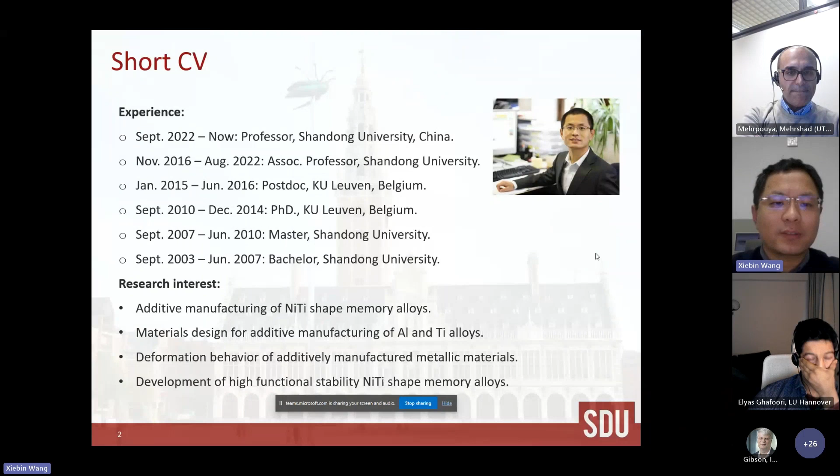Today, I would like to share our results on laser powder bed fusion, or LPBF, of nickel titanium binary alloys, and LPBF in situ alloying of nickel titanium niobium ternary alloys.

Firstly, I would like to introduce briefly what a shape memory alloy is. As compared with conventional alloys, shape memory alloys show the unique shape memory effect and super elasticity. For the shape memory effect, it means if you deform this material and then heat it up, increasing the temperature, the deformed part will recover back to its original shape.

If you look at the stress-strain curve, during loading, the material is deformed. After unloading, there is no recovery, so the sample remains in the deformed state. But if you increase the temperature, following the red curve, it will recover to its original shape. This is called the shape memory effect. And it also shows super elasticity.

If you look at the video, this kind of alloy shows very good elasticity. Looking at the curve, if you deform it, it shows a plateau. This is caused by stress-induced martensitic transformation, and during unloading, the martensite transforms back to the austenite phase. In the meantime, the shape of the material also recovers back to its original shape. This is called superelasticity, mainly caused by the transformation between austenite phase and martensite phase.

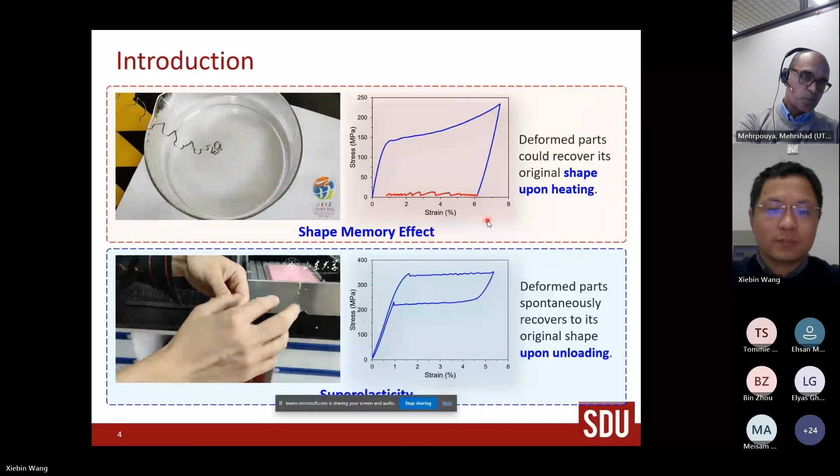Due to these unique properties, shape memory alloys have been widely used in many fields, for example, medical parts like stents and staples. But for nickel titanium alloys, they can only be used in a temperature range of about -20 degrees to 80 degrees, because the transformation temperature falls in this range.

Of course, there are other systems for shape memory alloys, like iron-based and copper-based alloys. But for iron-based alloys, the shape memory effect and superelasticity are not that high. And for copper-based alloys, normally you need single crystals. So this transformation temperature limits the use of nickel titanium alloys.

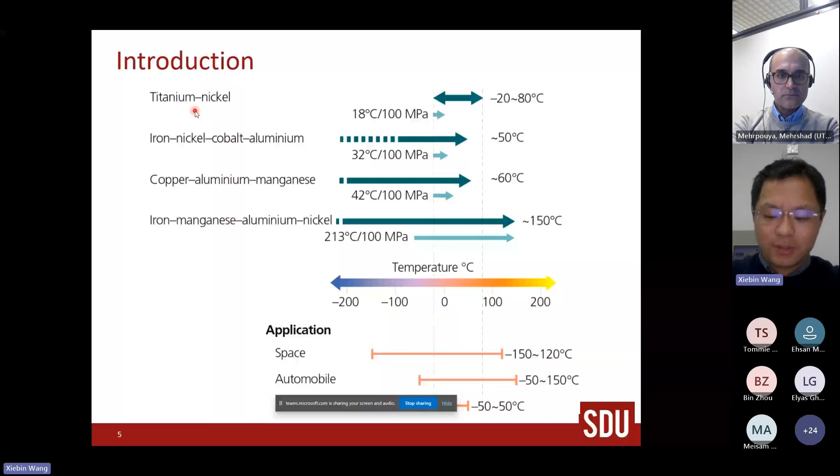In order to improve and tailor the transformation behavior and widen the application of binary nickel titanium alloys, people add ternary elements to modify the transformation behavior. For example, adding iron to nickel titanium lowers the transformation temperature, adding niobium widens the transformation hysteresis, adding copper narrows the transformation hysteresis, and adding hafnium increases the transformation temperature. This is called high temperature shape memory alloys.

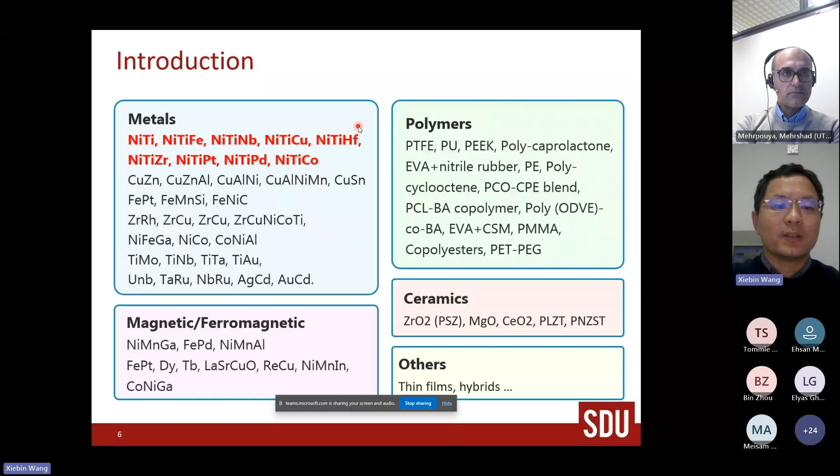But for this kind of alloys, there are several challenges to making them. I did a little summary: there are mainly two challenges. The first is that they're difficult to process. For example, if you want to make nickel titanium niobium ternary alloys, there is a very large difference in melting point between titanium, nickel, and niobium. So during casting, it's not easy to get a homogeneous melt, and the microstructure becomes inhomogeneous.

This gives a lot of problems for utilizing this kind of material. It's also easy to oxidize and forms a lot of intermetallics. Even after you cast this kind of alloy, when you want to make devices, you'll meet a lot of problems, mainly due to difficulty machining and welding these materials. Especially during welding, there are a lot of cracks and defects, which is very harmful for the mechanical properties.

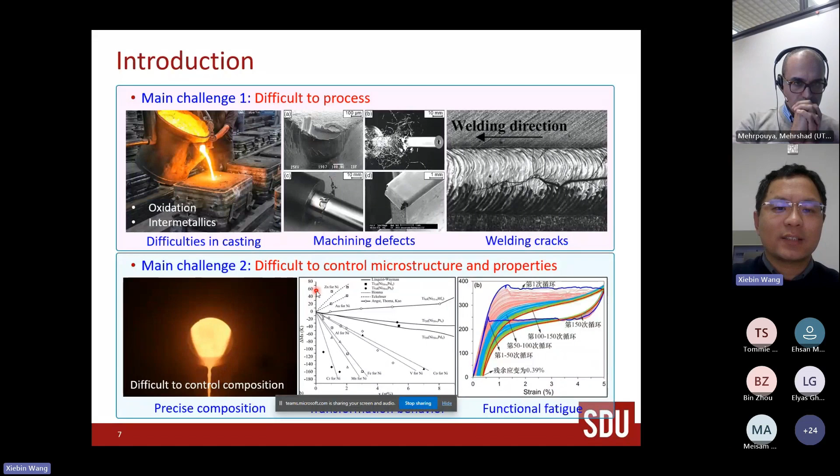So in order to address these challenges, we want to use laser powder bed fusion, or additive manufacturing, to solve all these problems. What we want to do is use laser powder bed fusion as a manufacturing method to make geometrically complex nickel titanium ternary or even quaternary structures.

We want to use laser powder bed fusion as a metallurgical method to do in situ alloying to make nickel titanium ternary alloys, using, for example, nickel titanium powders and niobium powders to make nickel titanium niobium ternary alloys. We also want to use laser powder bed fusion to tailor its microstructure and transformation behavior, and of course the functional properties.

Because the transformation behavior of nickel titanium alloys is very sensitive to its microstructure, if you change the LPBF process, you will more or less modify the microstructure, and based on this relation we could tailor or at least change the transformation behavior of these alloys. I will show the examples later. If we achieve all this, we may have approaches to make complex nickel titanium based alloys or structures with tailorable properties.

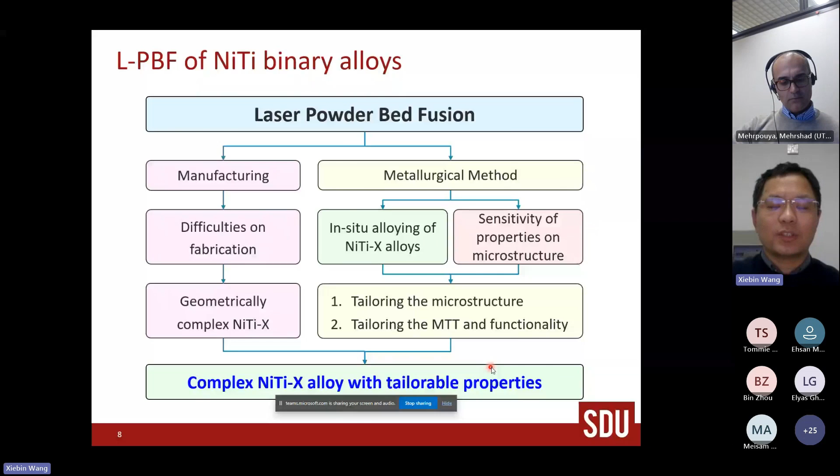In order to achieve this, we first analyze the interaction between laser and nickel titanium powders, and we found that a lot of phenomena occur during this process. For example, nickel evaporation, because nickel has a lower melting point than titanium, so at high temperatures nickel is more easy to evaporate as compared with titanium.

After the additive manufacturing process, the parts will have a lower nickel content than the powders. There will also be oxidation of titanium elements and precipitation of nickel-4-titanium-3 particles or titanium-2-nickel particles and other particles. Additive manufactured parts also show strong texture, high density of dislocations, and high residual stresses, along with coarse grains and microstructure inhomogeneity.

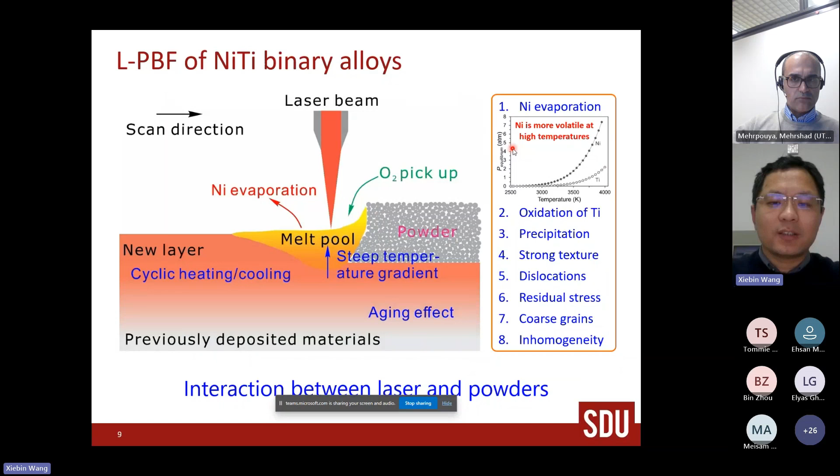Of all these factors, we found that the first one, nickel evaporation, is the most important factor influencing the transformation behavior and functional properties of nickel titanium alloys. We then printed these samples and did process optimization.

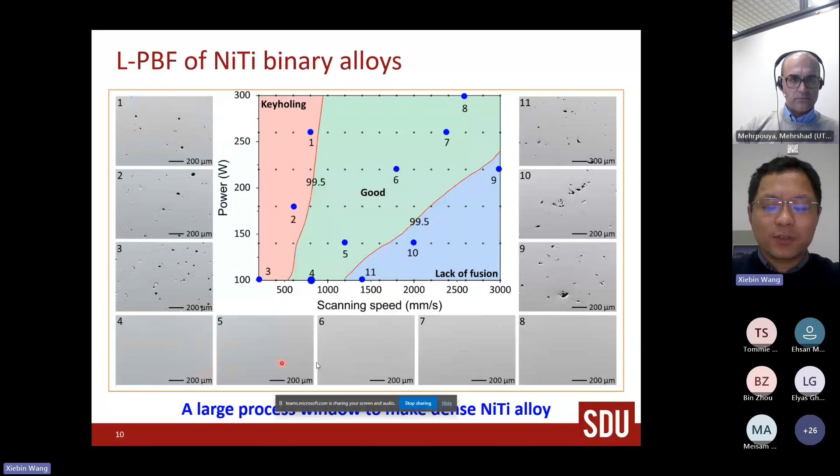It's very similar to other alloys: with high energy input you get a lot of keyhole pores, and with low energy input you get a lot of lack-of-fusion defects. But there's a large process window to get dense and almost defect-free samples.

Then we checked the phase transformation behavior. It's quite interesting that if you look at the transformation peaks, they shift gradually to the lower temperature side if you increase the scanning speed, keeping the laser power, hatch spacing, and layer thickness constant and only changing the scanning speed. So the transformation temperature decreases with the increase of scanning speed.

It also decreases with the increase of the hatch spacing, meaning that if you decrease the energy input, the transformation temperature decreases. The mechanism underneath this phenomenon is quite clear: if you lower the energy input, you lower the nickel loss by evaporation, so lower nickel evaporation leads to a higher nickel content in the matrix, and then a lower martensite transformation temperature.

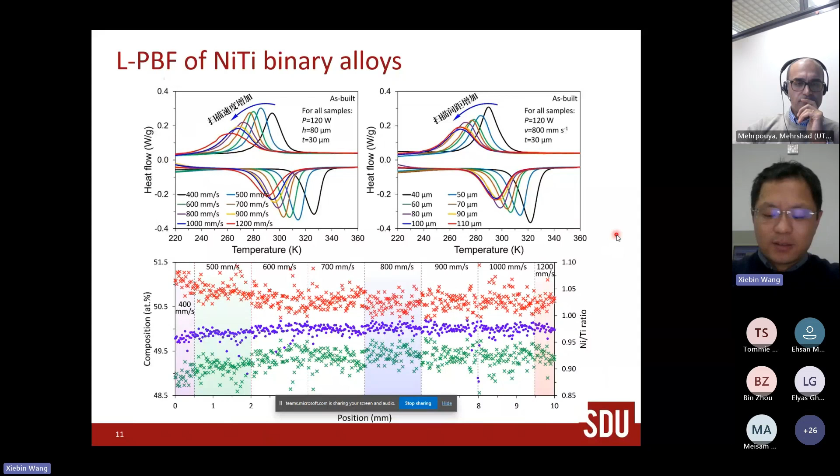So the very important aspect of these results is that if you want to tailor the transformation temperature, you normally have to control the nickel content very precisely, down to something like 0.01%. But with LPBF, you can just change the scanning speed - it's very easy to modify and then to tailor the transformation temperatures. If you want to tailor transformation temperature, you have to modify the process parameters.

But if we learn from the LPBF of other alloys, normally you need optimized process parameters to get a fully dense material. Here we changed the scanning speed from 400 millimeters per second to 1200 millimeters per second, which of course causes a lot of defects in the material with high energy input, like the 400 millimeter per second sample.

But interestingly, if we change this scanning speed from 400 to 1000 millimeters per second, the ductility or total elongation of these samples is almost the same, all higher than 12%. It means that even with such large keyhole pores, it doesn't undermine the ductility of this material, which is quite different from other alloys like aluminum and titanium alloys.

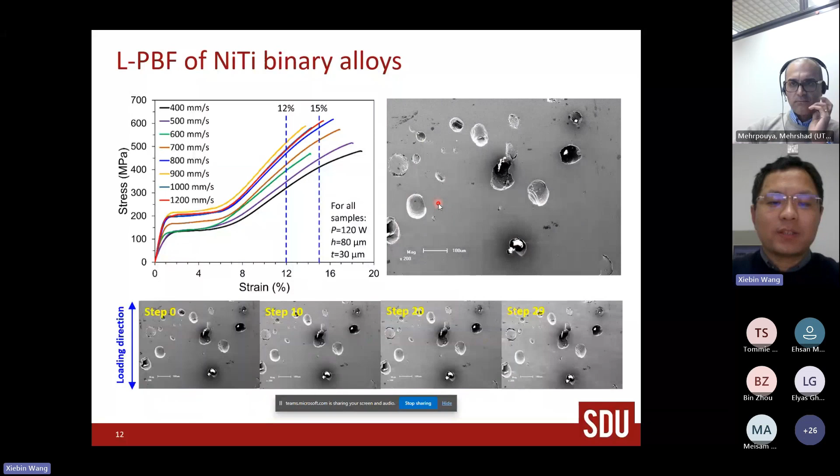But the reason for this phenomenon is very simple. If you look at the stress-strain curve, there's a plateau at a very low stress level, below 200 megapascals, or even at 100 megapascals, and at such a low stress level the sample can deform like 6%. So at this plateau the pores don't break, and that gives you high ductility.

And then we check the functional properties of this binary alloy. It shows very good shape memory effect at free recovery, and of course it also shows good shape memory effect at a constant stress of 100 megapascal.

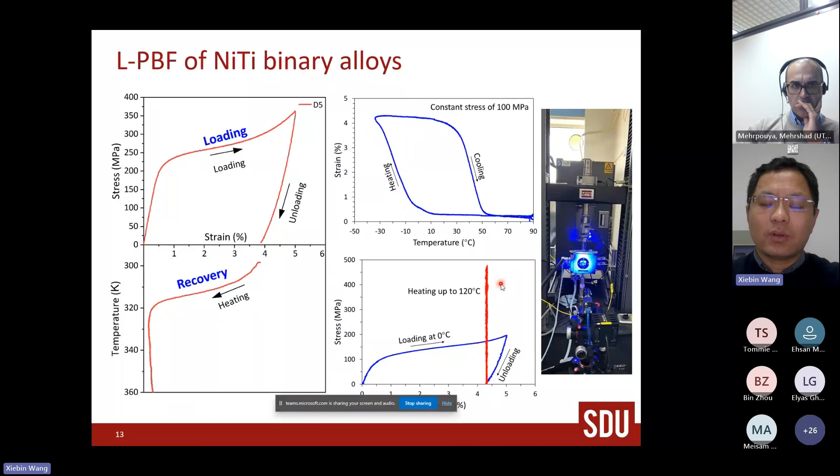We also checked the recovery force of this printed sample. The highest recovery force is higher than 450 megapascal.

We also measured the superelasticity of this printed binary alloy with a pre-strain of 5%. It can survive higher than 150 superelastic cycles, and after 150 cycles, the residual strain is lower than 1%. This means this material shows very good superelasticity, comparable to conventionally made nickel titanium alloys.

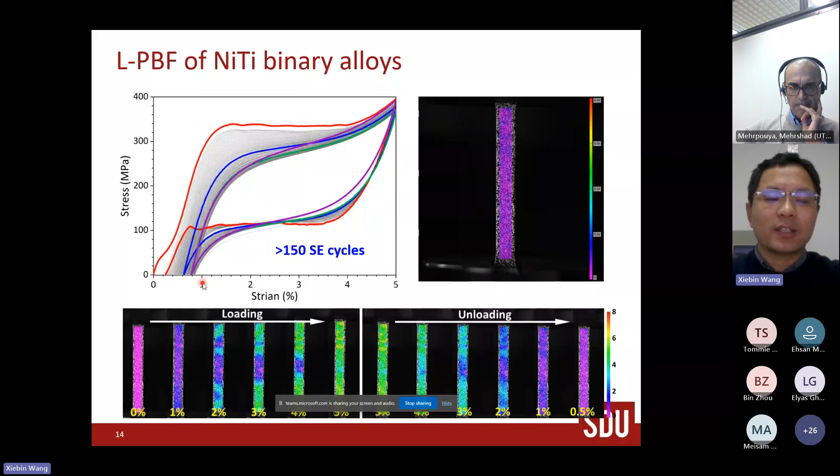The previous study shows that if you change the LPBF process parameters, you change the transformation temperatures of nickel titanium alloys. So we selected two parameters to produce this layer-structured material, with each layer having 200 microns.

Different layers have different transformation temperatures, and at room temperature we get this layer-structured microstructure. The colored parts are austenitic phase, and the black parts are martensite phase, because martensite has very fine features and for EBSD it's not possible to get clear patterns.

At room temperature, we get the austenite and martensite layered microstructure. For these materials, we could widen the transformation interval. For example, in conventional nickel titanium alloys, the temperature range between martensite transformation start and finish temperature is around 20 to 40 degrees.

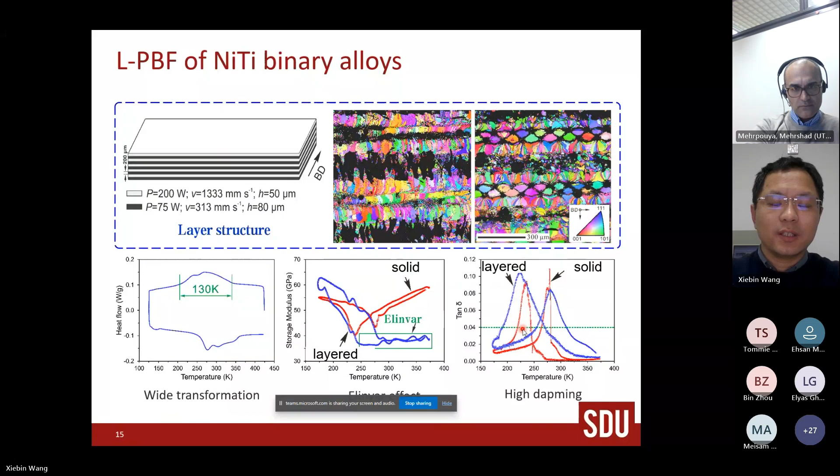Based on our experience making nickel titanium parts by LPBF, we continued this work using LPBF as an in-situ alloying method to make nickel titanium niobium ternary alloys.

Before starting the experiments, we did calculations to see whether adding niobium would cause a lot of solidification cracks. We used Thermo-Calc software, and the results, shown in red, indicate that adding 1% or 3% niobium leads to a lot of solidification cracks. But adding higher niobium content, like 5% or 9%, may give a crack-free sample.

Based on this analysis, we did the experiment. We used pre-alloyed nickel titanium powders with nickel content of 50.6%, and niobium elemental powders with almost the same particle size. After mixing, it looks very homogeneous.

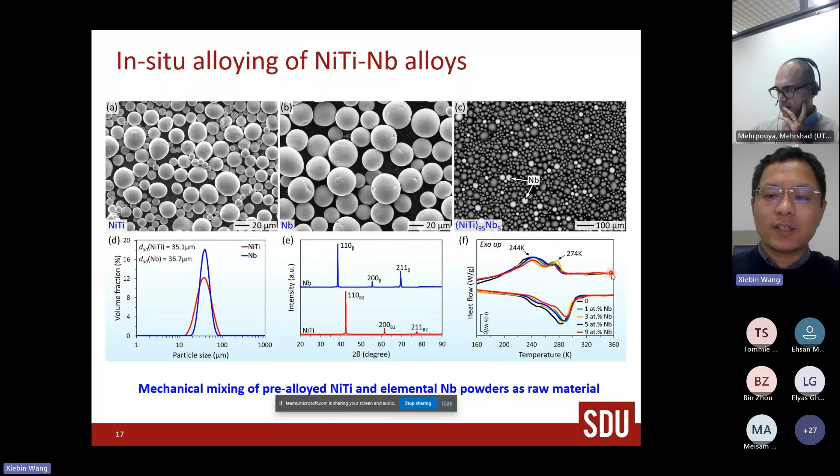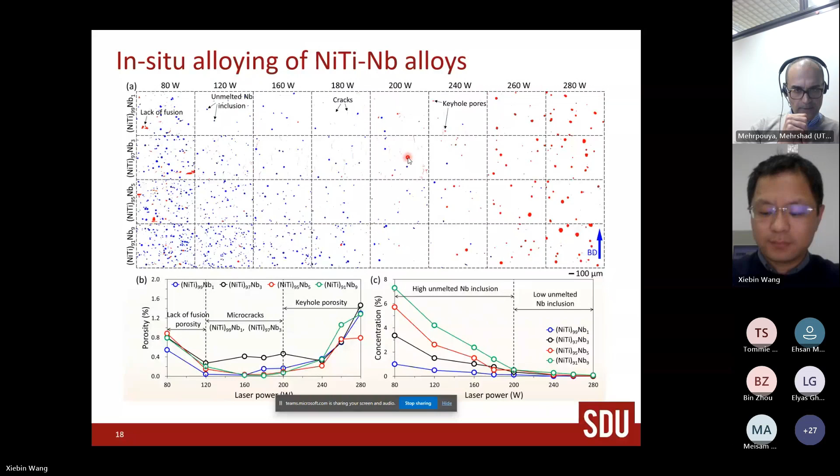We checked the microstructure, and it's a highly inhomogeneous microstructure with unmelted particles. For unmelted niobium particles, there's a strong metallurgical bond with the matrix, because there's a eutectic region between unmelted niobium particles and the nickel-titanium matrix. Also there's a lot of niobium-rich swirls, and in this niobium-rich region there's niobium dendrites and cellular structures.

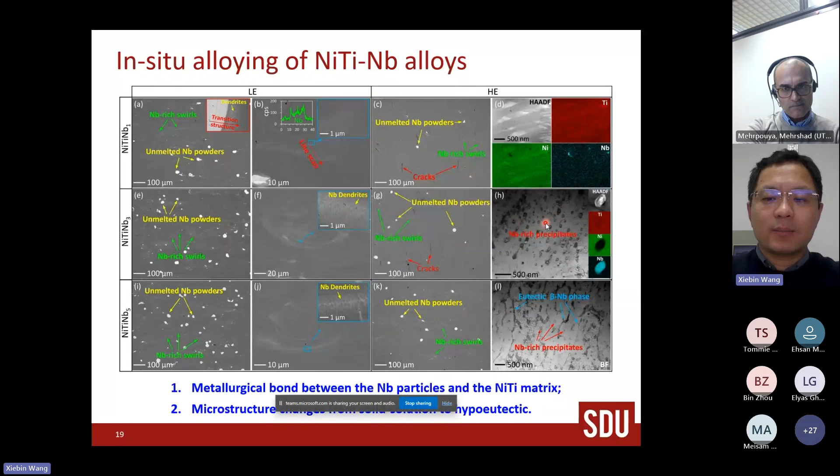If you look at more details with TEM, there's also some niobium-rich precipitates, and we checked the chemical composition — it's not pure niobium, it's niobium with some titanium. It's a beta niobium particle.

Then we checked the transformation temperature of these alloys. This result is actually very interesting. We know that for binary alloys, if you increase the energy input, you increase the transformation temperature. For example, if you increase the laser power, the transformation temperature will increase from the black curve to the blue curve.

If you add only 1% niobium, it shows a similar trend as binary alloys. But if you add 3% niobium, except for the sample printed with very low energy density, the rest of the samples — the blue curve and the red curve — show very similar transformation temperatures. So it means the transformation behavior is not that sensitive to the laser power change.

If you increase the niobium addition to 5%, the transformation temperature actually increases with a decrease of the laser power, or increase with a decrease of the energy input. It's totally opposite to what's observed in nickel-titanium or 1% niobium alloys.

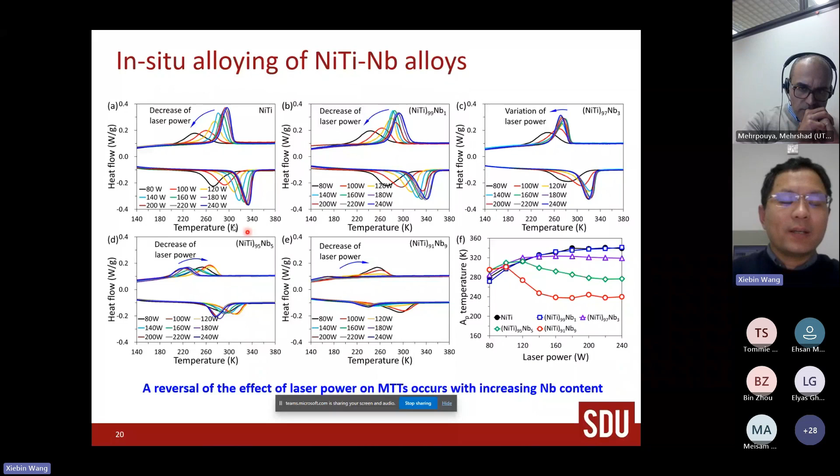Actually, this story is quite simple. It's a competition between the factor that increases the temperature and the factor that suppresses martensite transformation. The factor that increases the transformation temperature with increase of energy density is mainly nickel evaporation — more nickel evaporation, higher martensite transformation temperature.

But there are also factors that suppress martensite transformation. For example, dissolved niobium atoms in the matrix cause severe lattice distortion, and this lattice distortion suppresses martensite transformation. This effect increases with the increase of niobium addition. So with lower niobium addition, the factor that increases transformation temperature is key, and with higher niobium addition, the factor that suppresses martensite transformation is key. So the transformation temperature changes a lot with increasing niobium addition.

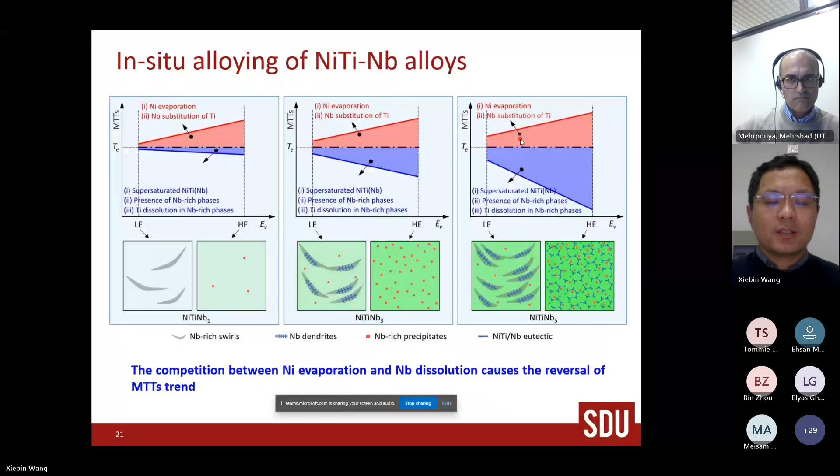For nickel-titanium-niobium ternary alloys, the most important property is the transformation hysteresis — the difference between the cooling peak and the heating peak. For the printed alloys, as well as conventional alloys, we check the hysteresis by first doing a pre-deformation and then heating it up to check the transformation temperature. For example, look at the first figure.

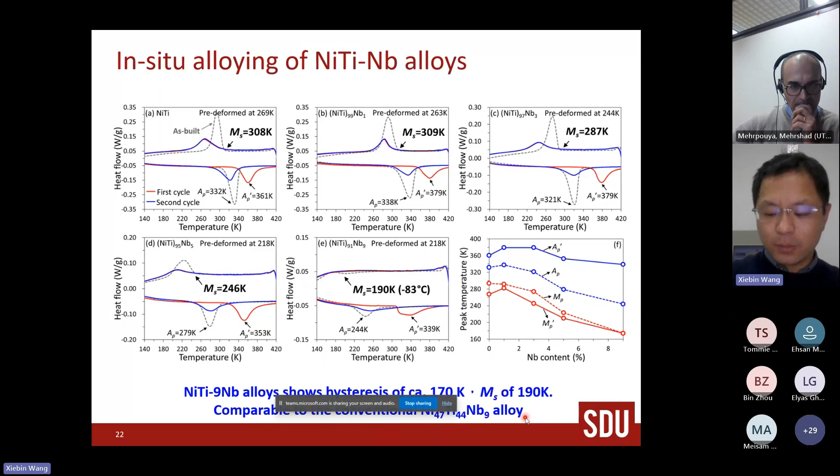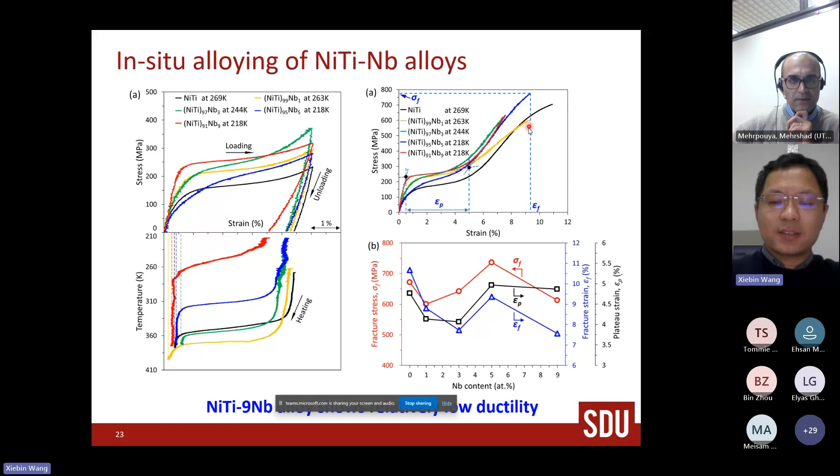Okay, I will quickly finish this presentation. So with the addition of niobium, we can widen its thermal hysteresis, similar to conventional nickel-titanium-niobium alloys, and we checked the shape memory effect — it's a very good shape memory effect, but its ductility is not that good. So we did heat treatment to increase its ductility, and after solution treatment, we could increase the ductility to over 12%.

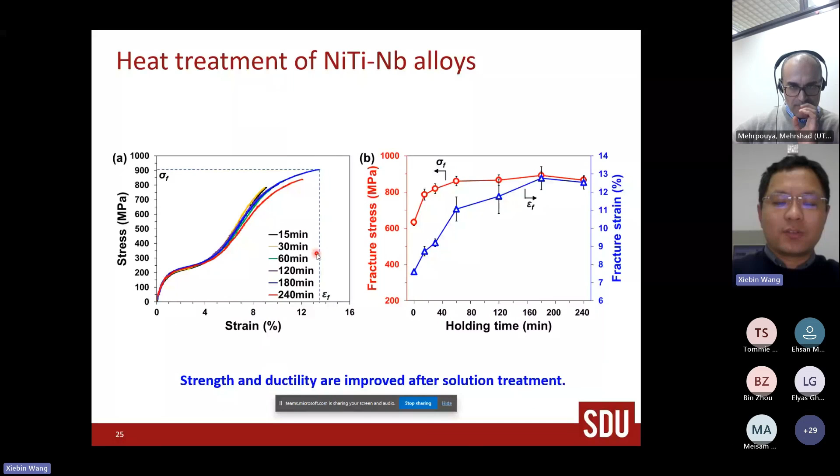After solution treatment, we compared the mechanical property with other alloys, and it's good as compared with the additive manufactured parts, but it's lower than the wrought parts.

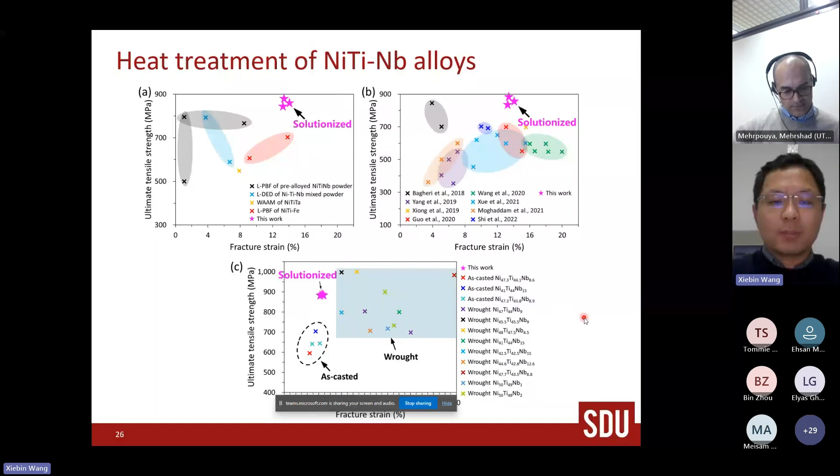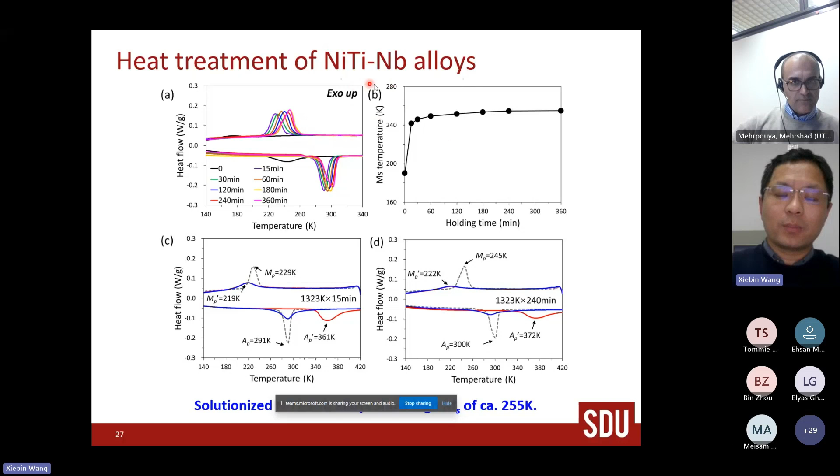After solution treatment, the transformation temperature increases to a high value, and this is not what we want for nickel-titanium-niobium ternary alloys. So we continued this work by using high nickel pre-alloyed powders, and we add extra nickel to lower the transformation temperature.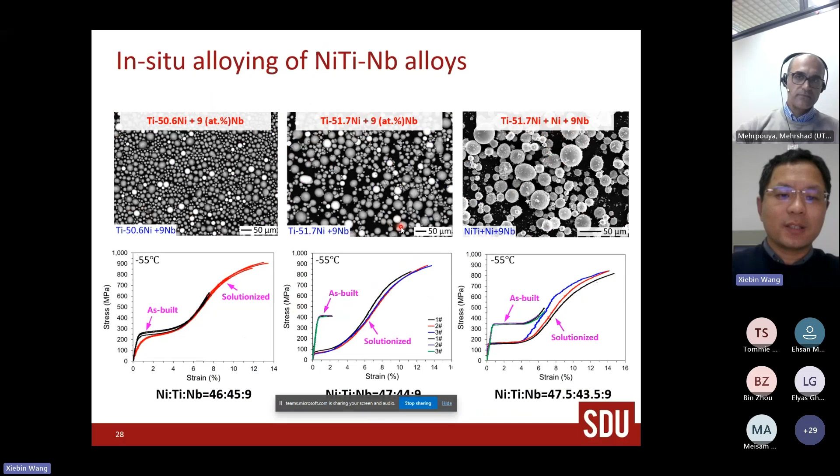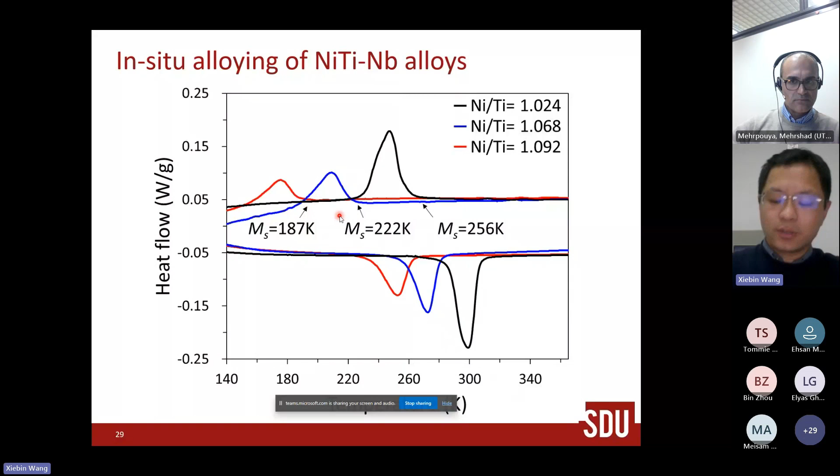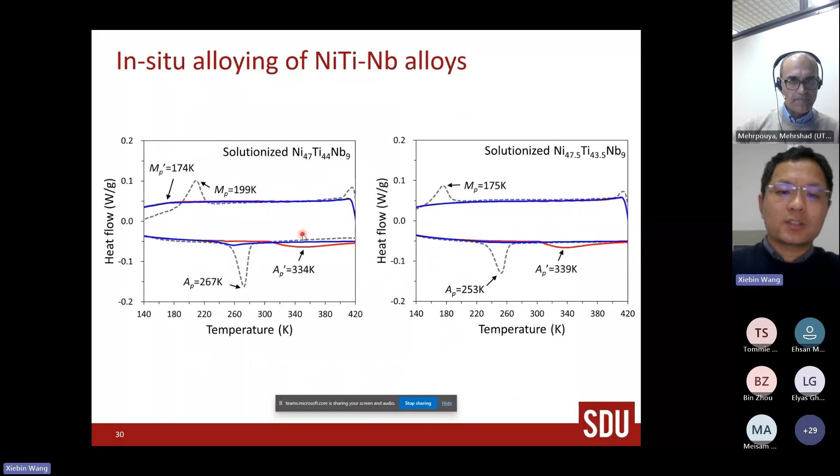After solution treatment, all these samples show very good ductility, and we could suppress martensite to as low as 187 Kelvin. It's very low, and comparable to the conventional nickel-titanium-niobium ternary alloys. Then we checked the transformation hysteresis.

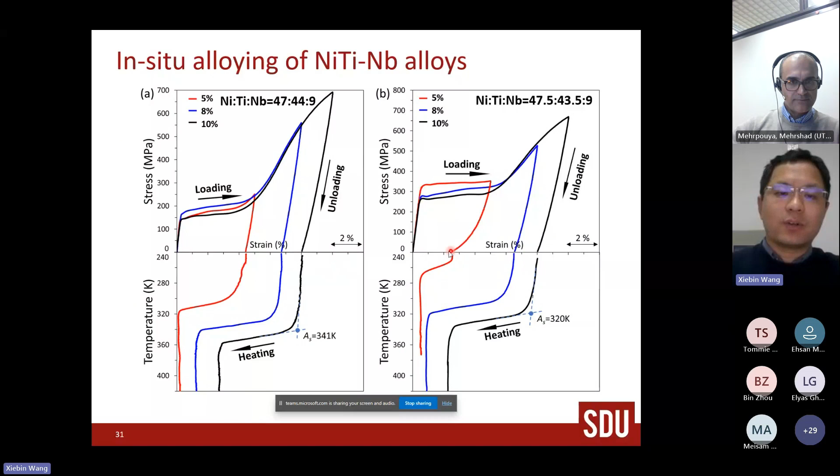It is large and comparable to the conventional alloys. We also checked the shape memory effect, which is good and could be used for couplings. We also checked the recovery stress with change of temperature, and it also shows very good results.

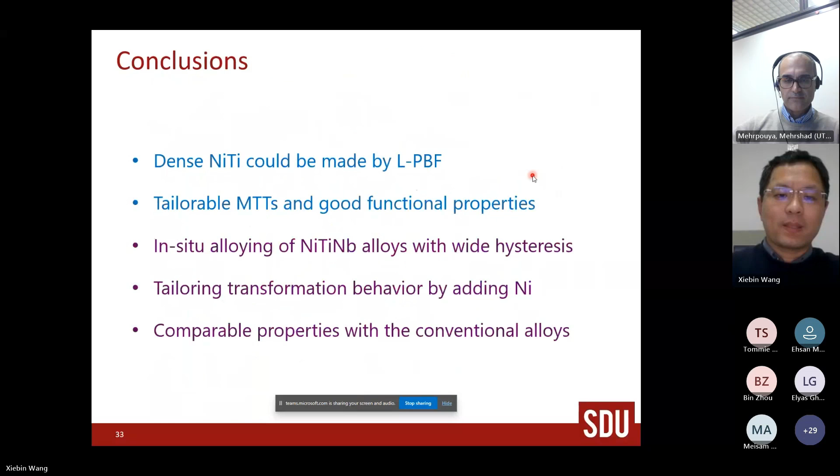This is the conclusion, and these are the related publications.

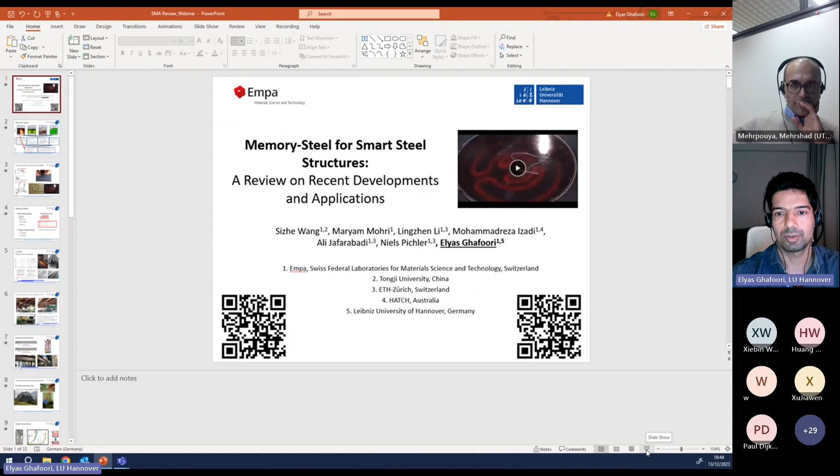You hear me well, right? Yeah, we hear you, see you, and now we can see also your screen. Very good. So you see the screen with the presentation, yes, right? Okay, good.

Yes, so my name is Elyas Ghafoori. I will try to make it a bit faster so that we almost finish at the same time as expected.

I'm the professor of steel, composite, and lightweight structures at Leibniz University of Hannover. I moved to this university nearly one year ago, and before that I used to work at EMPA, Swiss Federal Laboratories for Material Science and Technology in Switzerland, also at ETH Zurich. So the research I'm presenting here today is mainly about the research we have done at EMPA, so all the credits go to this institute.

My colleagues there are intensively working, and also credits go to the authors and co-authors listed here for the work that has been done by the PhD and master students. I'm talking today about memory steel for smart steel construction structures, mainly a review on recent developments and applications on this topic.

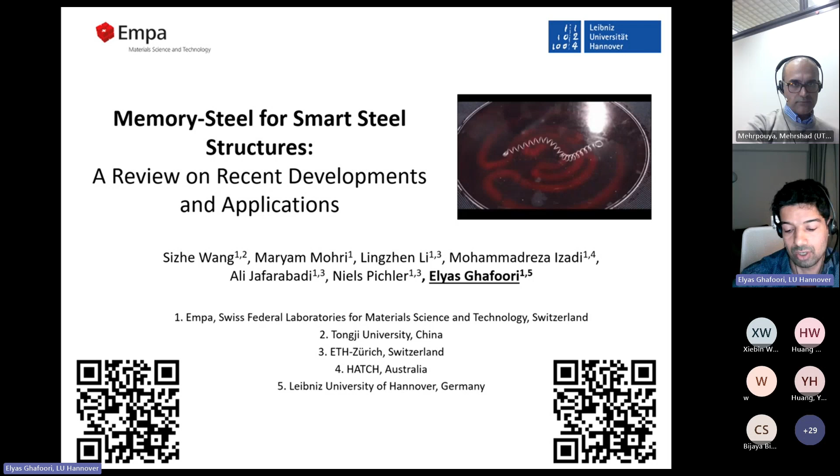So unlike the last speaker, it's not mainly about AM of shape memory alloys, but rather a new type of shape memory alloy, iron-based shape memory alloy, that provides good potential for larger scale applications in construction in the civil engineering domain.

So just a short overview about our activities in the Institute for Steel Construction. I'll try to turn on my laser.

Yes, we are working on different fronts. So advanced structural materials, which includes shape memory alloy, for example, but also fiber reinforced polymers, CFRP, or glass fiber reinforced polymer, GFRP, are one of those. Epoxy adhesives, but also additive manufactured steel using powder bed fusion, but also wire and arc additive manufacturing. This could be a steel, but also shape memory alloys.

Automated robotic construction, robotic welding, different type of AM processes, 3D printing of shape memory alloy, which we call 4D printing. Steel support structures, so we are growing with the scale - here at the smallest scale, and here it's becoming a bit larger scale with wind turbines. In particular, the support structure of wind turbines, which are mainly 70-80% steel. We are working on different details: grouted connection, welded connection, bolted connection, and also their structural health monitoring.

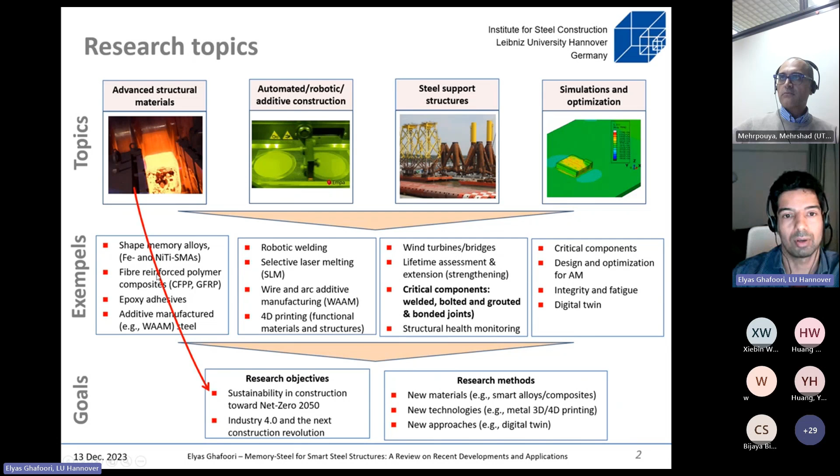Today I'm talking, so you see that there are a wide spectrum of activities. I mainly talk about advanced structural materials, shape memory alloys in particular. The last speaker has given you a good overview about shape memory alloy.

I'll keep it short. This is superelasticity - that means energy dissipation, and everything happens at room temperature. And this is shape memory effect, that means that we pre-strain the shape memory alloy, and then after heating - here with hot water and here with temperature - they can actually recover their shape.

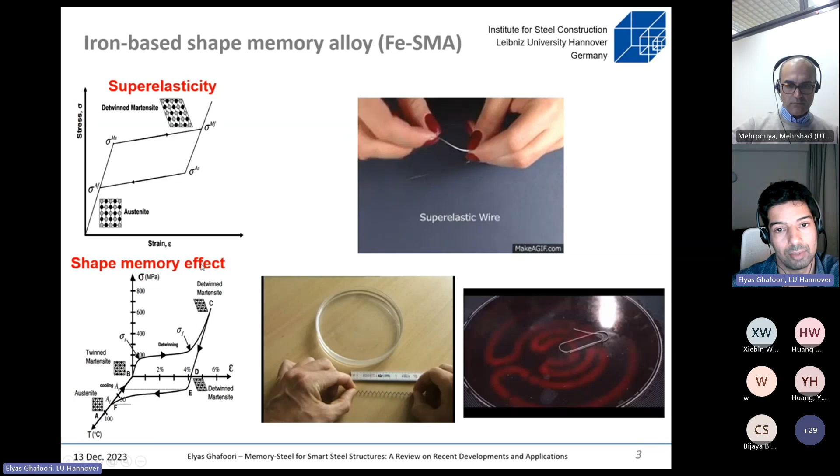So during the pre-straining, the material is changing from austenite to martensite phases, and during activation they change from martensite to austenite. So the last speaker talked mainly about superelastic behavior, and now I'm talking about shape memory effect - so it's actually complementary, right?

There are different SMA systems. There are nickel-based systems, nickel titanium, copper, and so on, and copper-based alloys also. There are different systems, also iron-based, they have different systems - Fe, nickel, cobalt, titanium, which is also used, which is work also by our colleagues in Kassel University. But today I'm talking about Fe manganese silicium.

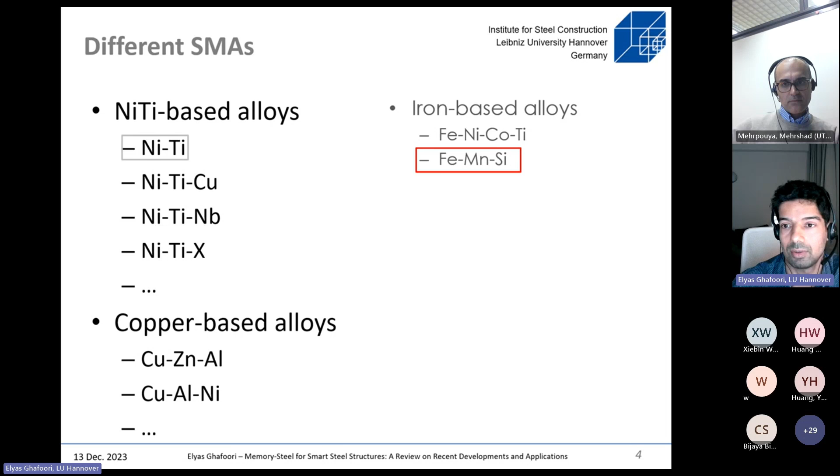So that's a special alloy that has been developed and patented at Empa about 15-20 years ago. This alloy has been engineered and developed for civil engineering applications. Why is that important? Because the alloy has a high Young's modulus.

So when we talk about nitinol, the Young's modulus is relatively good, but it's about 30 to 70 gigapascal. With iron-based shape memory alloy, we can go up to 200 gigapascal. So it's actually good - it's in the order of steel, so you can really use it as a structural member.

Also, it's very cheap. With nitinol, some sorts are expensive, sometimes as expensive as gold. With iron-based shape memory alloy, patented and developed here, we're at relatively the same price scale as stainless steel. So it's still more expensive than structural steel, but it's not as expensive as gold.

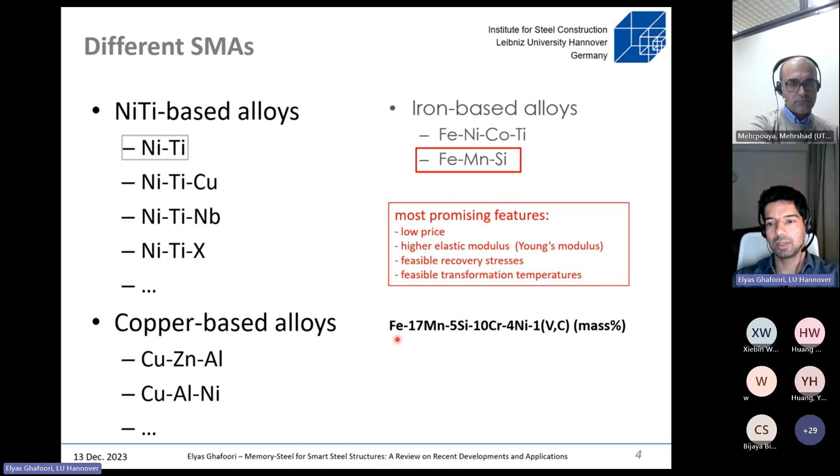And also the transformation temperature for a feasible recovery stress has been set to those that are feasible for construction. In construction, normally we deal with temperatures between -30 to plus 70 or 80. This is the exact composition you see here.

My talk today is about the application of shape memory alloy. We also work a lot on characterization, optimization, and improvement of shape memory effect, but also superelasticity. As the last speaker correctly mentioned, iron-based shape memory alloys have limited superelasticity but very good shape memory effect. We recently tried, within an EU project, to improve the superelasticity of iron-based shape memory alloy by applying special heat treatments. But there are also iron-based shape memory alloy systems that have good superelastic behavior.

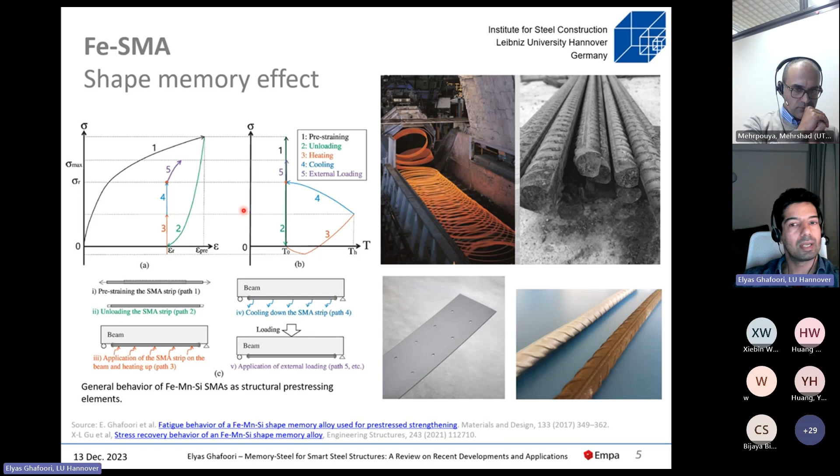So we pre-strain, let's say, a strip, we unload that, and then we apply that to a civil structure. It could be a concrete beam, a steel beam, or a timber beam. We could bond the shape memory alloy to a steel beam, or use rivets or bolts to connect them, and then heat it in a heating and cooling down process. During heating, you can see the stress increases, and in the stress-temperature diagram we gain some stress during heating, but also some stress during cooling. With that, we can actually have our structure pre-stressed.

Here is the first application of this type of iron-based shape memory alloy worldwide, for strengthening of bridges. This is a 113-year-old bridge in the Czech Republic that we strengthened with a few plates of iron-based shape memory alloy. You can see on the top left picture the connection to the steel structure, because the whole bridge is steel, and they have good compatibility.

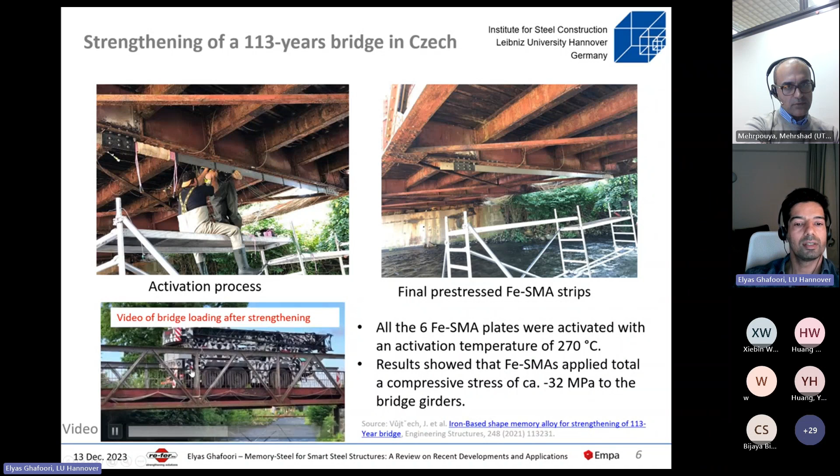Then you can see here the activation blanket - we activated it with a blanket. You can see on the bottom the truck test before and after strengthening. We also have, as you see here, the connection with rivets.

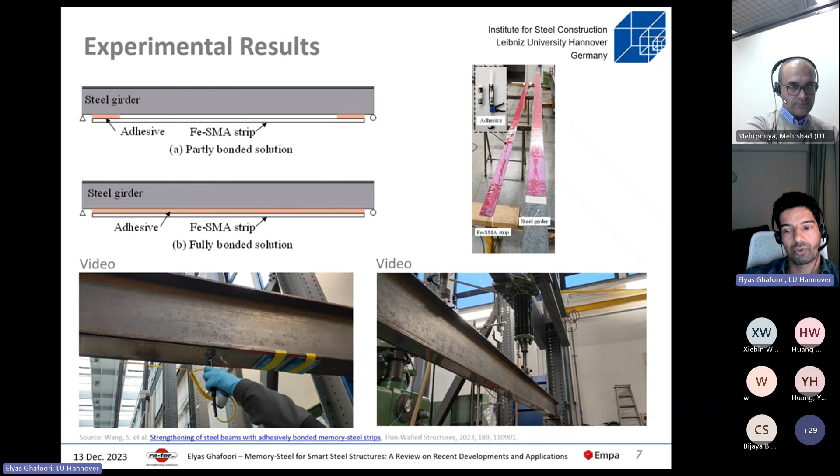This is the strip with Sika adhesive, and here is the activation process. You see here we put some ice packs to keep the anchors cool, and then using a thermocouple we measure the temperature to make sure we have the right temperature for activation. Afterward, we did fatigue tests, more than 2 million cycles, on a few beams, not only one beam, to make sure about the structural integrity of the system.

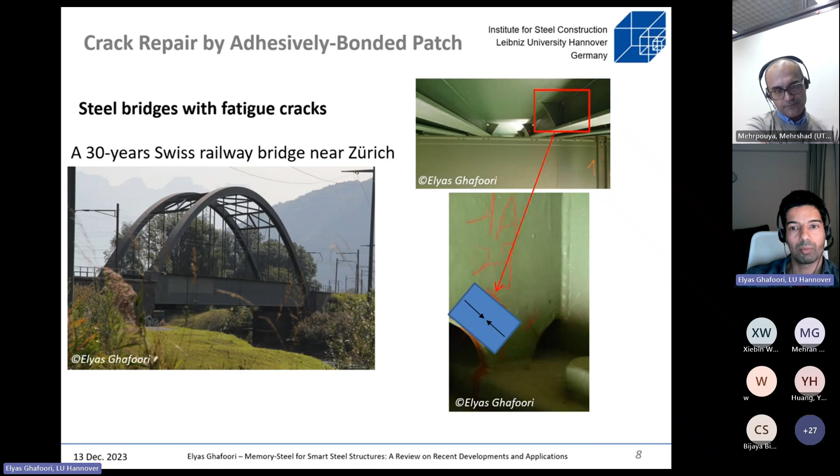Here we actually try to use a FESMA patch that could arrest the existing crack. We bond the FESMA to the existing crack detail, and then we just heat the area over the crack to activate the pre-stressing, pre-stressing the patch, and the reaction is applied to the crack. When the crack is under compression, it will not grow anymore. We know that cracks grow under tension.

So this is a running project right now. We have a few different PhD students. You can see some of our publications here - they are trying different types of patches, small patches as small as your palm. So you can apply it really quickly on the area where there is a crack, let it cure, and then heat it with different methods, whatever method is more convenient. We could also apply CFRP, carbon fiber reinforced polymer sheets, on top of that.

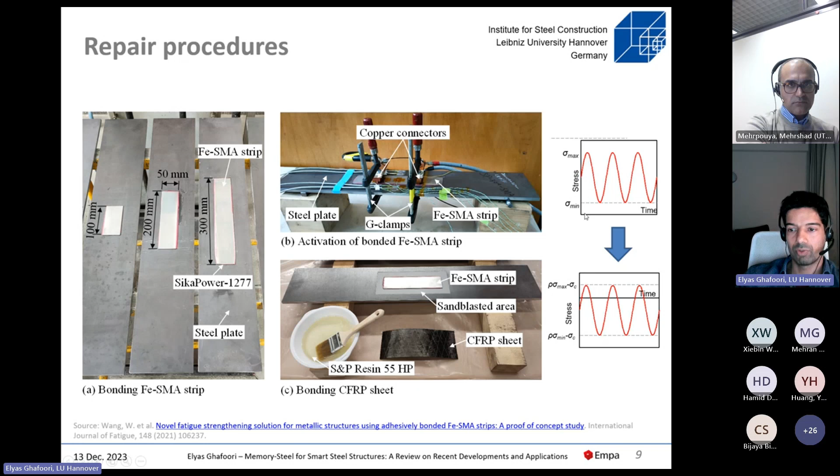There are different techniques we are trying right now. With them, we can decrease the amplitude of the stress along the steel plate, but also we can push the stress history from tension at the critical detail near the crack. Under this patch, there is a crack under tension-tension-compression, so only the tension part is effective, from 0 to maximum tension, and so we can reduce the stress amplitude. We did tests, and we showed that with such a system, we can arrest an existing crack.

Of course, the bond is very important here, so we have done extensive lap shear tests. Here we have a steel plate and an SMA plate; we bond them and pull the SMA on the right side. Then we see how the debonding propagates between the shape memory alloy and the steel plate, using different types of adhesives. Here you can see Sikadur 30, but also Sika Power and Araldite. Each of them shows a different type of structural behavior, and from that we derive the bond-slip behavior.

Due to time, I will skip this, but I will move on to this slide about 4D printing.

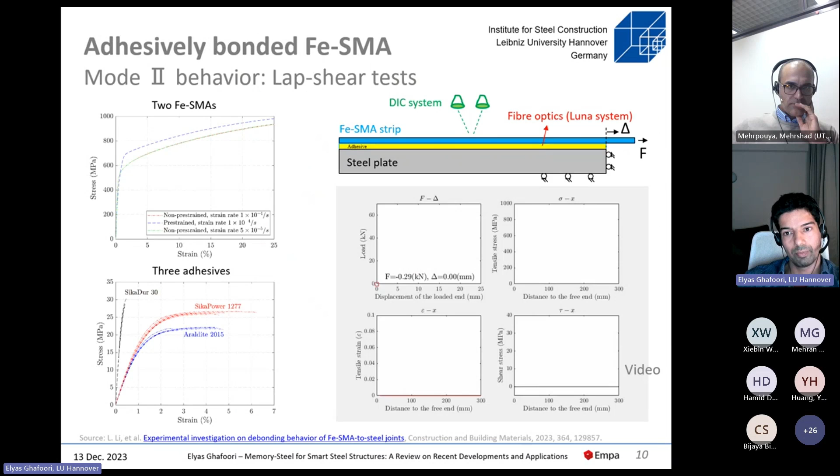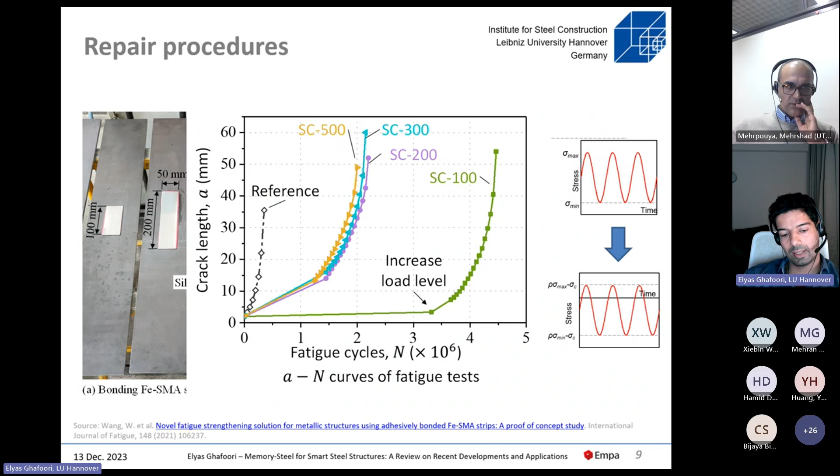I showed you earlier the process of manufacturing the alloy, starting from billets. There is a hot rolling process, a typical hot rolling process. The advantage of this alloy is that a typical stainless steel manufacturing process can be used for producing it, which makes it suitable for larger scale manufacturing, and that's why the price is decreased.

So you can actually use many existing production facilities in different countries that exist for manufacturing stainless steel, for the production of this alloy. There are billets, and those billets go through a hot rolling process, a typical hot rolling process, to make these beams and girders, all the steel girders you see around you. Normally they are hot rolled up to 3 millimeters thickness of the strip.

Then from 3 millimeters to 1.5 millimeters strip thickness, we go with a cold rolling process, which is also a typical process. That's the reason the alloy is cheap: you can use traditional steel manufacturing processes. You don't need special equipment, furnace, and so on, and it doesn't have to be done under vacuum. That's very important — you can do it at atmospheric conditions.

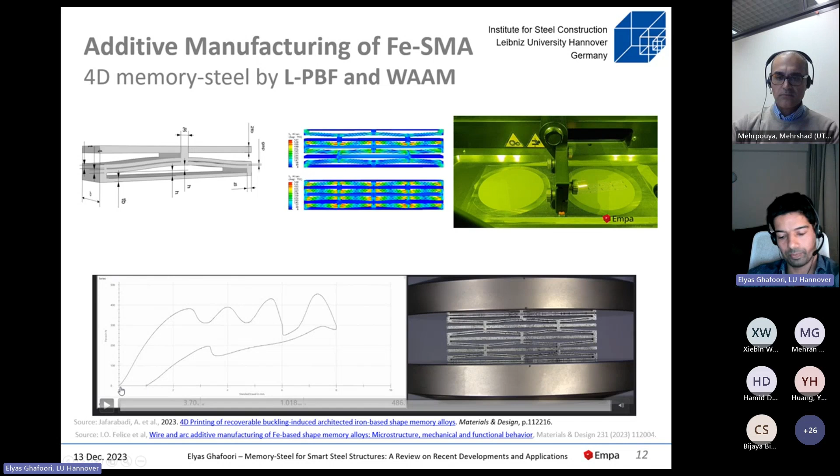Where can this be used?

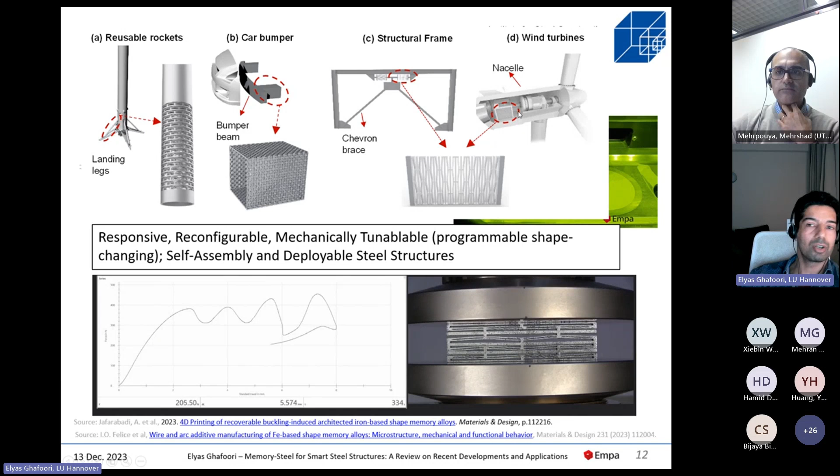They can be used, for example, in landing legs of reusable rockets, car bumpers, for seismic applications in civil engineering, and for vibration mitigation in wind turbines or anywhere needed.

Take home message: memory steel. We call it memory steel, but you can say iron-based shape memory alloy is a smart steel. When you say shape memory alloy, many people might not know what it means, but when you say smart steel, it's easier for people to understand. It's an alloy which has been designed and also used in civil engineering. It's the only one that is commercially available in construction. You can buy it actually.

It has a strong shape memory effect that gives us the possibility of pre-stressing the structure. It has limited superelasticity, and we are working to improve that.

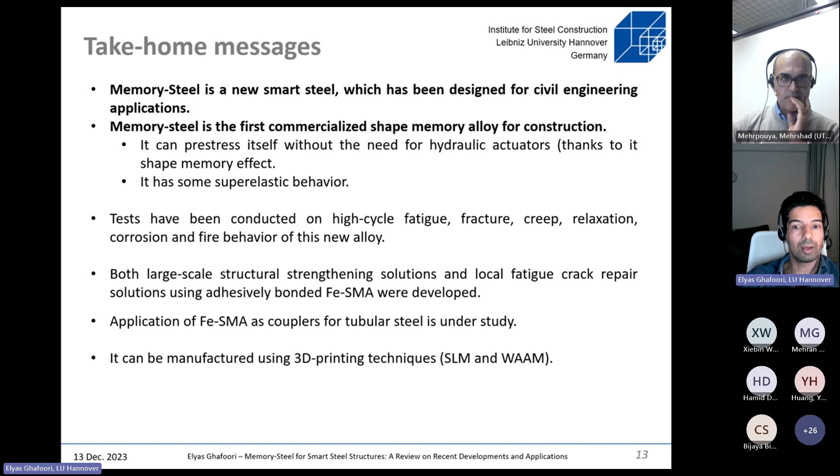Unlike nickel titanium, which the last speaker also correctly mentioned, which is very sensitive in 3D printing, because during 3D printing some of the elements evaporate, and that substantially affects the behavior of the shape memory alloy, nickel titanium in particular. This alloy is not very sensitive to a bit more or less manganese or chrome, so it has good stability for 3D printing applications. It's not very sensitive to the exact components and ingredients.

Thank you very much for your attention. If you are interested to know more about shape memory alloy, you can scan our LinkedIn and the webpage of our institute. If there is any question, I will be happy to answer.

Okay, thank you, Elyas. Thank you very much for your presentation. We already have a couple of questions here in the chat. I'll start with the one I see: we found FESMA very brittle when we produce it with LPBF. How did you overcome this?

Different processes might have different results. We actually do some heat treatment often on those FESMA samples. It depends how you do that, but if it is about brittleness, we didn't have this issue that they are brittle. Even as printed, they were good. So what I showed you, they were as printed, but to improve further ductility, you can do some sort of heat treatments. For this particular FESMA, we have actually a few papers dealing with how to heat treat additive manufactured iron-based shape memory alloy to improve the ductility. I will be happy to share it with you. You can just send me an email, please. If you go to our website, you will see my email.